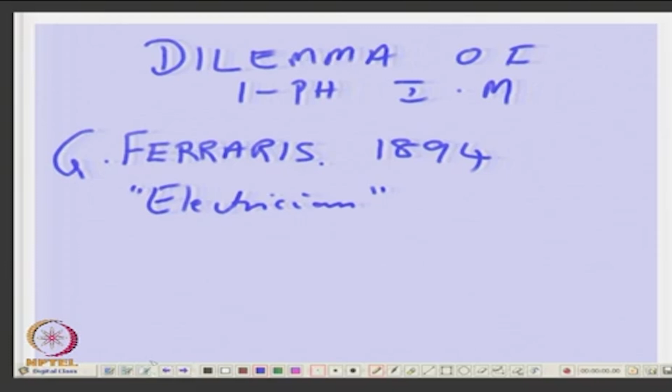So it was this which postulated, as we mentioned in the last class, that if you have 3 phase lines A, B, C, and you have the stator A, B, C phases, and the rotor is squirrel cage with a common shaft, he said all you have to do is take A, B, C and make it A, C, B.

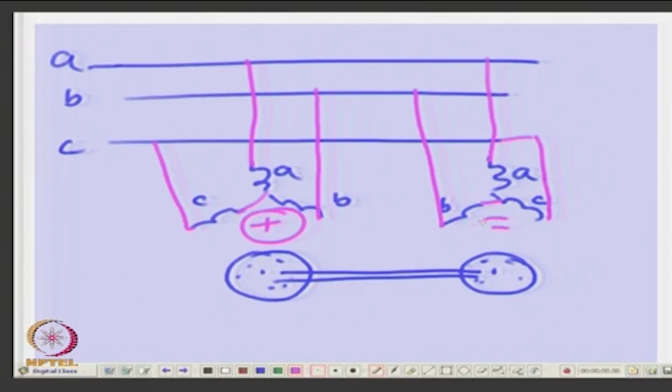That means you connect properly for these ones, and the same windings you connect in a different way. This is positive sequence, this is negative sequence.

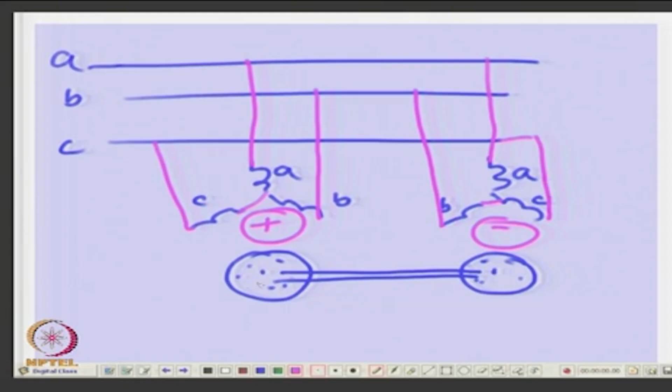That is what was postulated, which meant that this will spin the machine in one direction and this will spin the machine in the opposite direction. So the net torque will be, if this produces T1, this produces T2, it will be T1 minus T2, that will be the torque. And this was what is known as the Ferraris model.

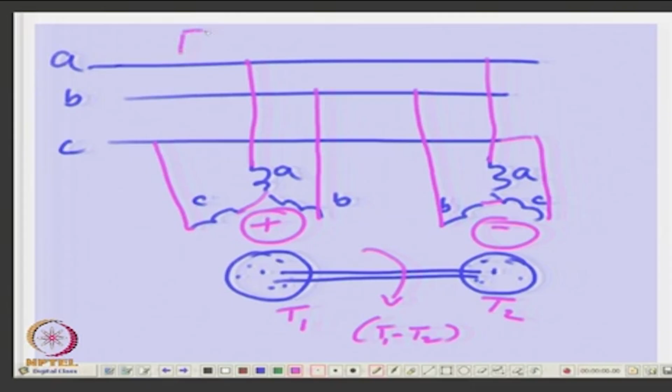But this was found to be later wrong. Why? We tried to explain last class why it was found to be wrong. He said this single phase motor was supposed to be equal to this, right, whatever this motor was producing, the torque or the currents or the heating must be same as this. Because we found out that if you pass a single phase winding, it produces two counter rotating fields in the air gap, and the reaction of the motor will be a cumulative reaction of both the fields.

But I explained last time there is some fallacy in this logic. What was the fallacy? Forward field is not equal to the backward field because the slip is different. Because at different slips, the reaction of the rotor to the forward field will not be same as the reaction of the rotor to the backward field. So the rotor gets magnetized differently at different slips.

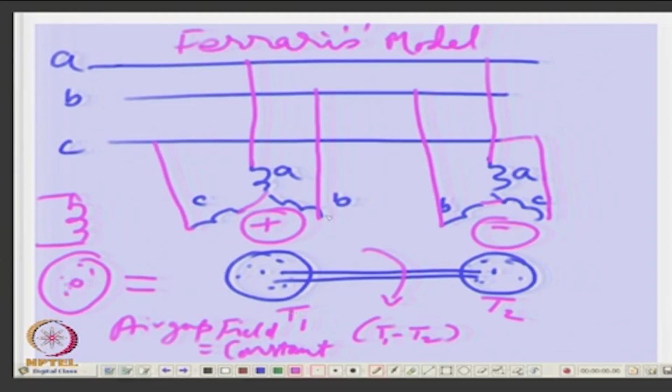So what this assumed was, the air gap flux here forward and the air gap flux here backward are both equal, this flux and this flux, because they are applied with the same voltage. And you should know that flux is always proportional to voltage and MMF is always proportional to current. MMF that is produced is proportional to the currents carried or the magnetizing current, whereas air gap flux is proportional to voltage applied. Why? What is the relation? You must remember that voltage is equal to 4.44 F into N into phi. So as long as you maintain the voltage and frequency constant, your flux will remain constant, neglecting the series drops etc.

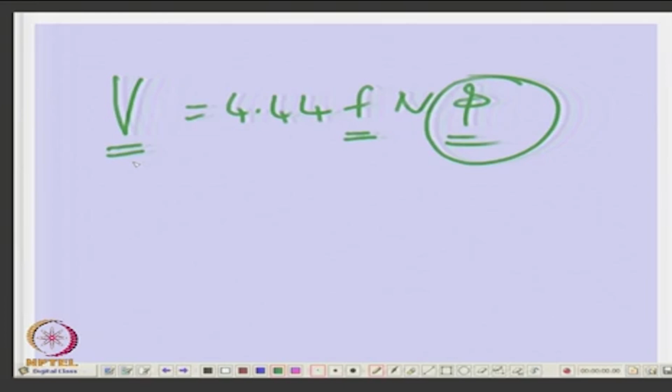Therefore I am trying to emphasize this, that in a 3-phase induction motor, throughout the operation, so long as the voltage and frequency is constant, air gap flux per pole is constant, only that flux per pole is rotating. It is like you are spinning a fixed magnitude magnet in the rotor, that is what it means. The air gap is like you are spinning a magnet, but the magnet is not changing its strength. Is that clear? Because from your reaction I am feeling your reaction is also not very positive. Is it clear? Any doubt on this?

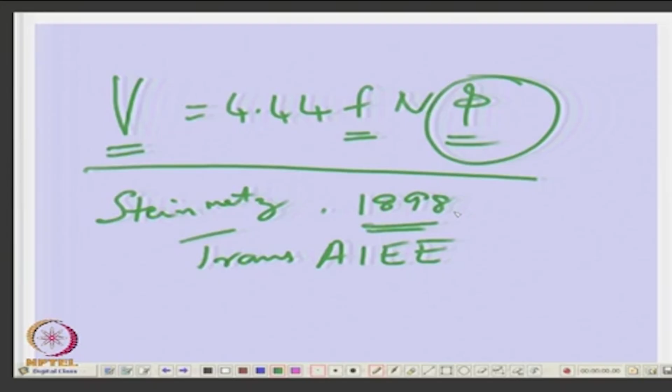So that was Ferraris's concept. He said it is like two air gap rotating fluxes, rotating field means he meant rotating fluxes. But then Steinmetz gave a new concept. Ferraris's paper was in 1894, and Steinmetz's was in 1898, in the transaction of American Institute of Electrical Engineers. You can imagine we are talking about a 108 years old story. In this 1898 paper, Steinmetz gave what is known as the cross field theory.

Which is now popularly known as DQ theory.

He said a single phase machine has to be resolved into two fluxes at quadrature and analyzed appropriately. This is the DQ model. Those who have studied machine modeling know what is known as a DQ model, and you can write down those DQ equations to get the solutions, and this gave the correct concept.

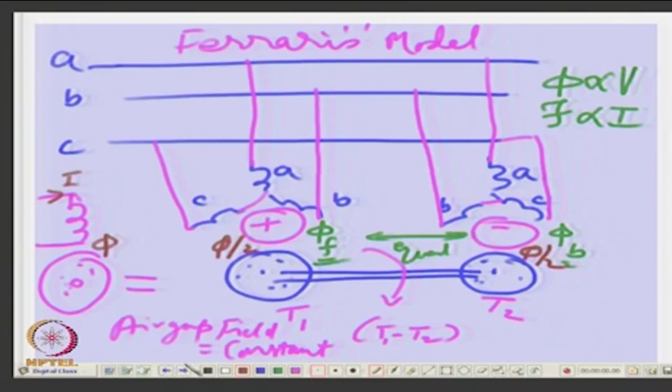The problem with this model was that the current carried here was not the same as the cumulative current of both systems, even though you make the flux half. If this is flux phi, this flux is supposed to be phi by 2, and this flux is supposed to be phi by 2. If the single phase motor was having a flux phi per pole, this should be phi by 2 and phi by 2. But this current was not the same as the total current carried by both machines, and this heating here was much more than the other, and the torque was different at other slips. This created problems, and that is why the cross field theory came.

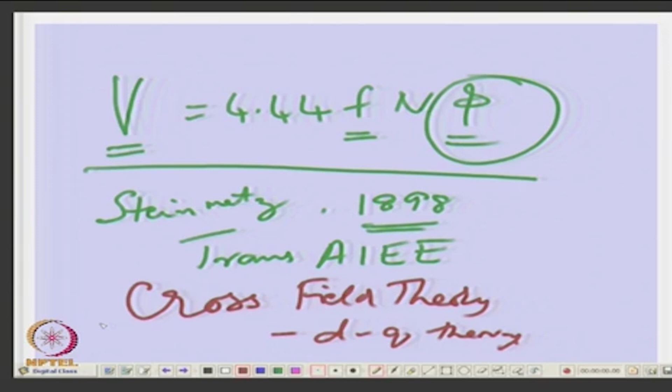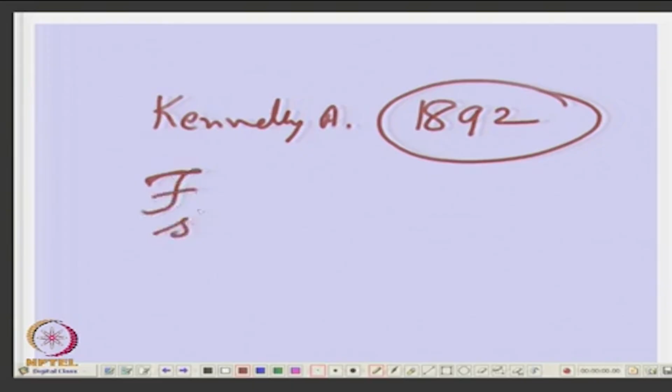As an explanation to this, it was Kennelly, in the same paper, as a comment to the same paper in 1892, who said it is possible to explain the single phase machine with rotating field theory, provided we do not assume the rotating fluxes are the same, but assume that what is the same is the rotating MMF. So rotating stator MMF Fs plus will be equal to Fs minus. That was the whole concept we had to take care of.

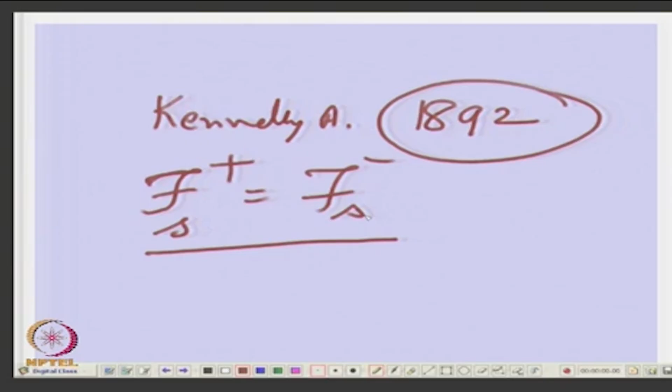Now, how do you explain this? Can we write this down? We have this one machine. So what you can do is, instead of connecting them in parallel, you connect them in series.

Let us say from A phase it goes to A winding. This is the other A winding. Now the other one is B winding, it comes here, but the B winding is connected to the C here, supposing ABC here and ABC here. So you have connected the other way around, and similarly for the C winding, you connect it to the B winding.

So in this case, Fs plus equals Fs minus, but phi plus is not equal to phi minus. So if you connect the stator like this, this is the correct way. That means the stator winding should be connected in series and not in parallel.

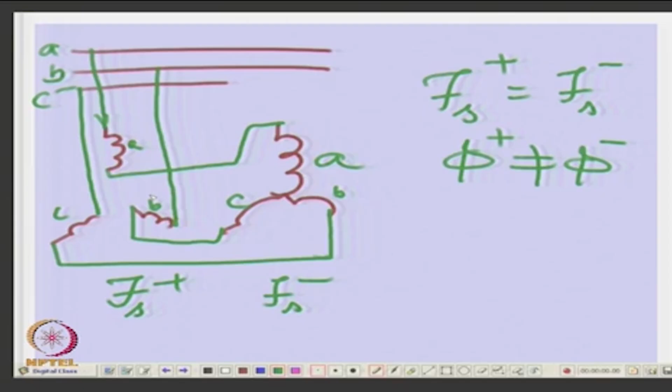If you connect them in series, this is your Fs plus and this is your Fs minus. Since the same current is flowing through, only thing is you have made the stator MMF opposite by connecting it in the opposite way like this. So this is Kennelly's connection, or a series connection.

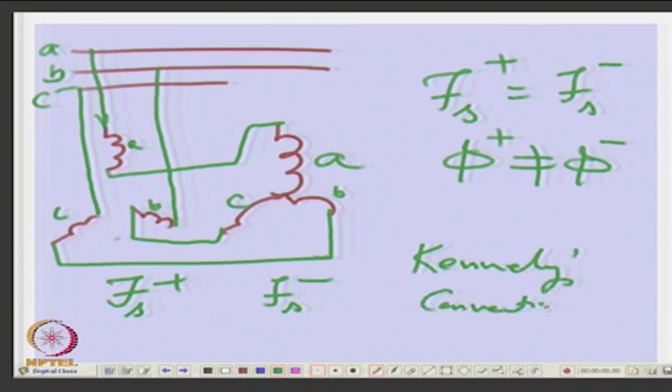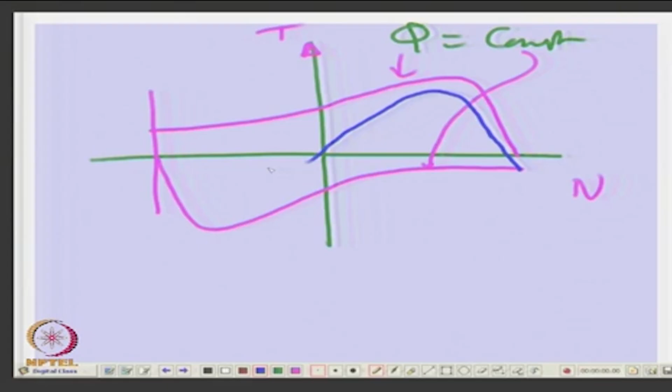So we said that if you have the flux constant, you have one type of curve for torque versus speed. This is flux constant, so this flux is constant, same as this same flux, and you have a resultant, say something like this. This is the net torque, this is T forward, T backward. Throughout, the flux is maintained constant. That is the one model which is not correct.

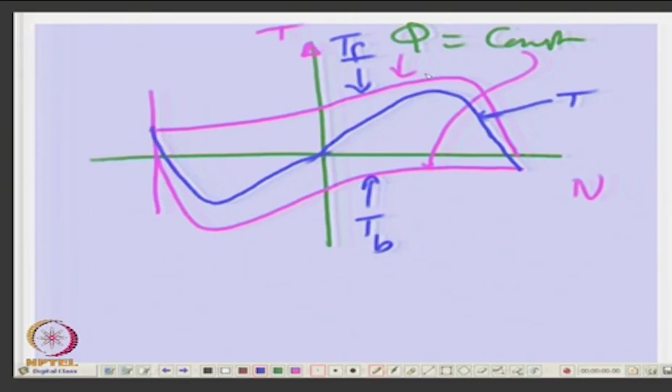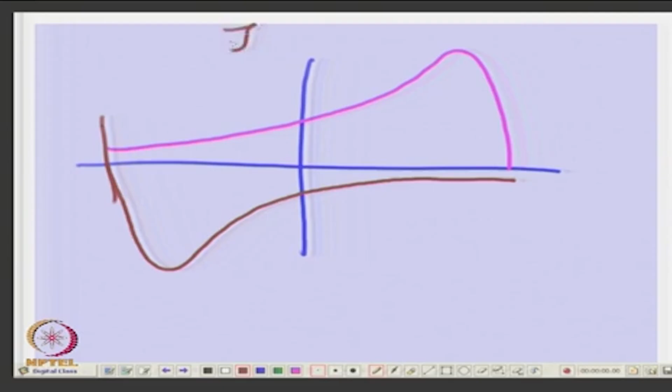Then the other model was where you do not keep the flux constant. Here Fs plus equals Fs minus, and phi plus is not equal to phi minus. Is it okay? It is this connection, in which case your net torque will be something different.

This is the torque. Now you are getting more torque in the forward field than the backward, because rotor reaction was different, other than at starting. So at all these points you would find that phi f was more than phi b at all other speeds.

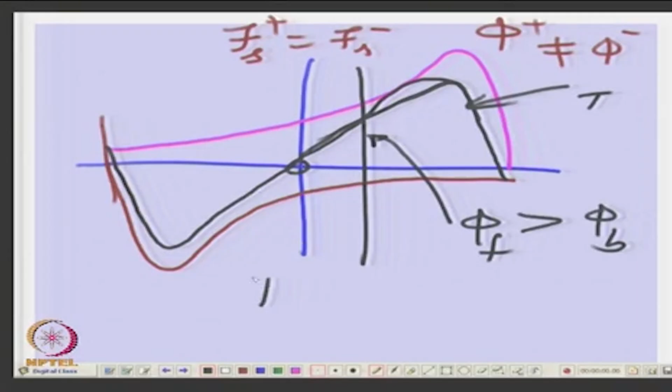Why was the forward flux per pole more than the backward flux per pole? Because flux is due to the combination of stator MMF and rotor MMF, and the rotor MMF was weaker. The rotor MMF was in a way that it would enhance the forward flux, and it would reduce the backward flux, because rotor current due to the backward field was more, because of larger slip. Therefore this was the condition. So you will notice that you will still get T start equal to 0, starting torque is 0. Then what do you have?

You have another feature, that at synchronous speed, what do you notice at synchronous speed? There is a negative torque at synchronous speed, that is what you notice. And third one, you notice that there is another point of zero torque. It is below synchronous speed.

Here T is 0 and N is less than synchronous speed, and this is your synchronous speed. So these are some features that you will notice, and you will also notice that the maximum torque occurs at some point which is at a lower speed than what it would occur if only forward field were there.

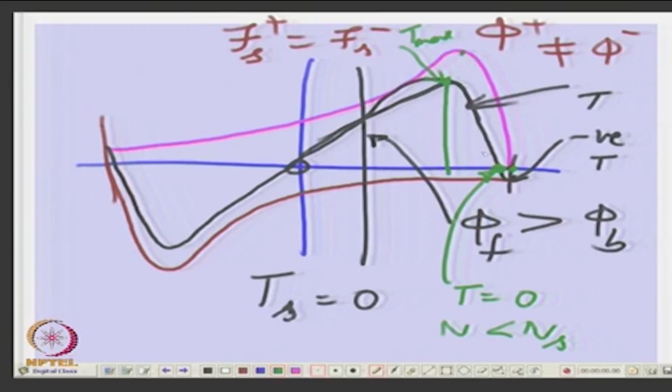So the single phase motor, you will notice the maximum torque occurs at a lower speed, the slip at maximum torque is at a different point, and the starting torque is 0, and there is a zero torque at a speed slightly less than synchronous speed, and at synchronous speed the torque is not 0, but it is negative, because the torque is 0 only due to forward field at synchronous speed, but there is some negative torque due to backward field. So these are some of the observations that we can make on the single phase induction motors.

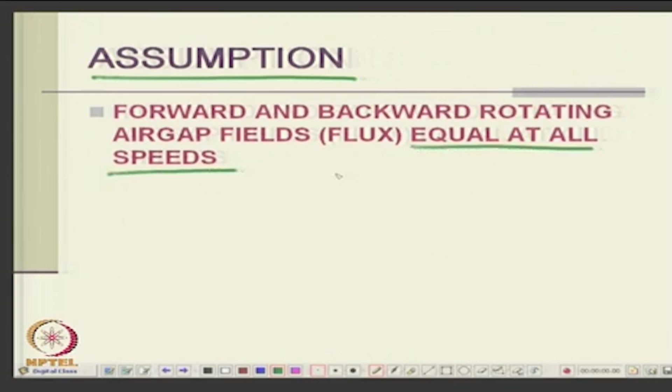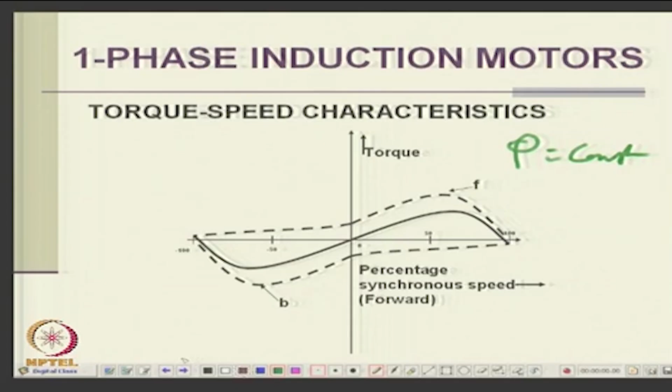So, to sum up, we already said forward and backward rotating flux are equal at all speeds. This is a wrong assumption, this was when flux is constant. This was known as the Ferraris model, which was not correct. Then we said that Fs plus is equal to Fs minus, only the stator MMF is valid. Then rotor MMF opposes stator current.

So there is a reduction in the backward flux wave and aiding in the forward flux wave. That means in the air gap, if you look at a forward rotating magnet, it is a stronger magnet than a backward rotating magnet, unlike in the double revolving field theory where it was assumed to be the same magnet. So that will change at different speeds.

So the forward torque of the motor increases, so we have better characteristics. So here, Fs plus equal to Fs minus, this is what we had concluded. I am slightly emphasizing this, spending some more time, because I think you have to be very clear. At this point, if you are not clear, let me know.

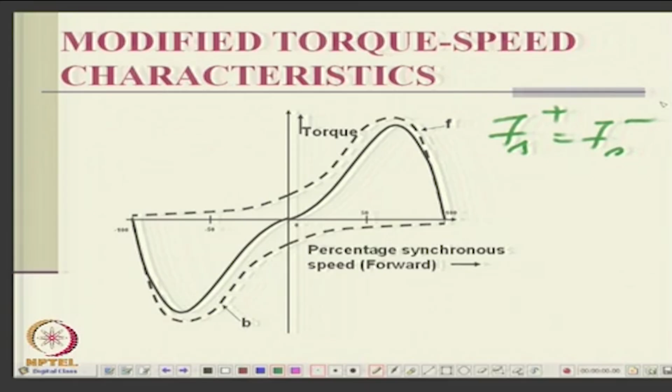So it is simply that the stator surface is magnetized differently and the rotor surface is magnetized differently due to the respective excitations.

So therefore, it does not have a starting torque, therefore you must give a starting torque. Initial deflection is required to start the motor. So initially you must start, but there is a running torque. As soon as you start, there is no problem, it will run. Therefore, initial deflection can be provided.

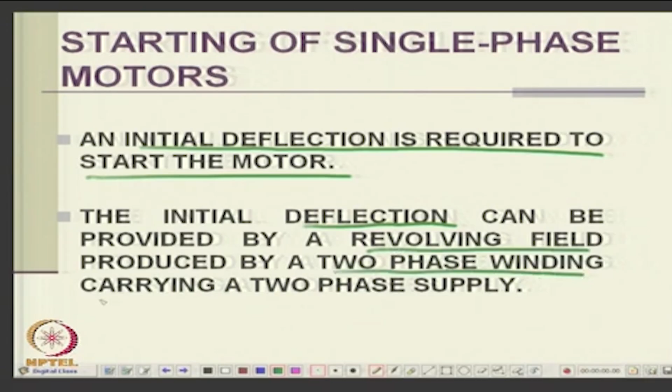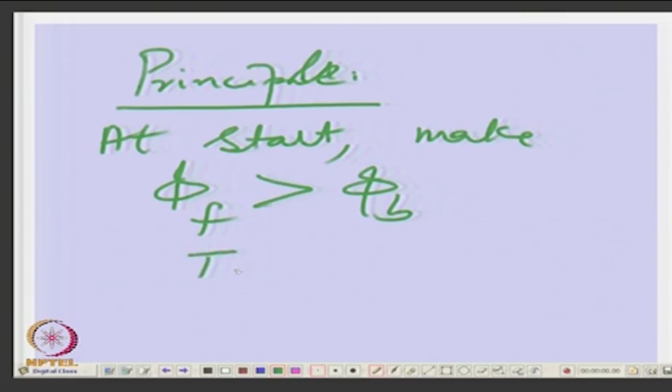That means at starting you must make the forward field stronger than the backward field. So you must have a revolving field produced by two phase windings carrying two phase supply. So the basic principle is: at start, make forward field more than backward field. That is your principle of starting. Somehow make it so that at starting you have a stronger forward field than the backward field. Then T forward will be more than T backward, so T starting will become positive.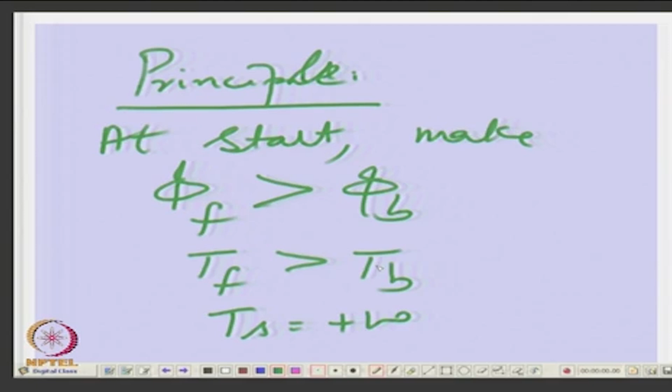So how to make the forward field stronger? The procedure used is to use two windings: one is the main winding, another is the auxiliary winding. There are two windings and they are at quadrature.

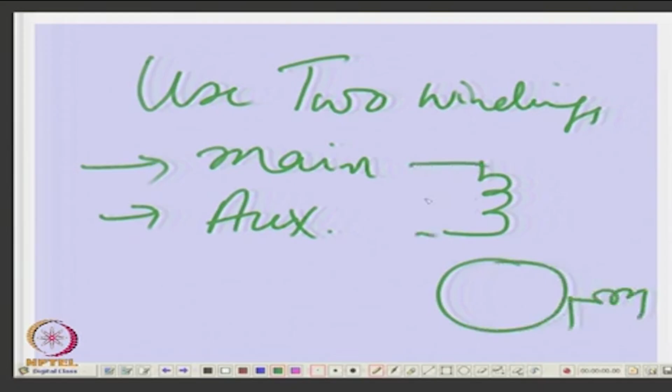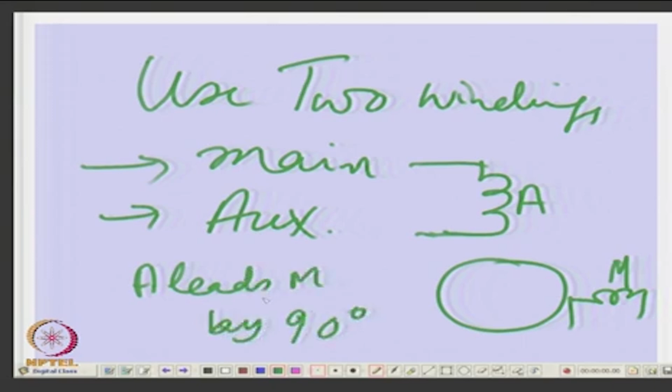Now, if this is leading, this will be the auxiliary winding, this will be the main winding, because A leads M by normally 90 degrees. They are wound in such a way that the auxiliary winding leads the main winding by 90 degrees electrical. So you have to wind it that way, so it is called a two phase winding.

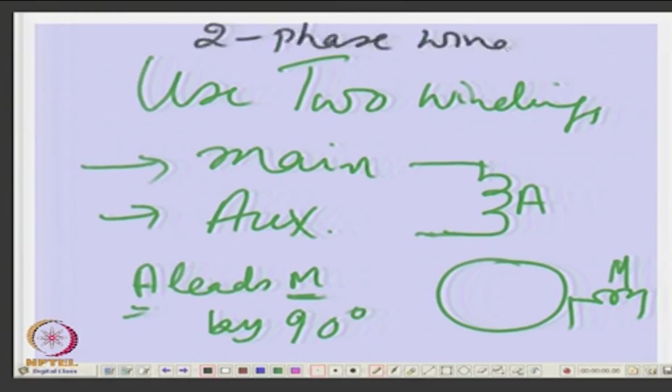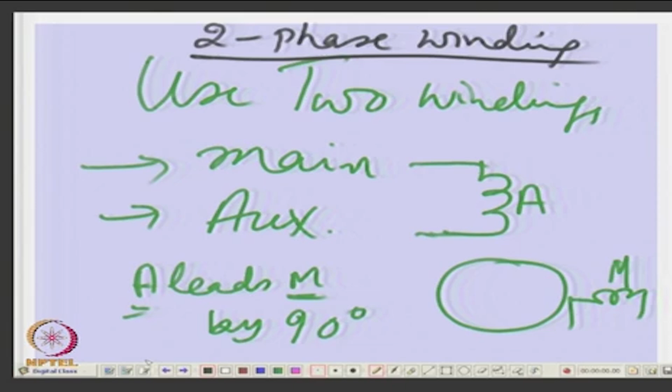So use the two phase winding, that is what we should do. Now just placing two phase windings will not do, there is another requirement: you must make I at the auxiliary winding lead I at the main winding. This is also important, because just two phase windings, if they carry the same current, will not be of any use, it will again give a pulsating field.

Therefore, if this is I A, this should be I M or whatever it is, so it should be leading, preferably by 90 degrees. But even if it is not, it will still create a forward field. Desirable is 90 degrees, but even if it is 40 degrees, it will still produce a forward field. Windings would be ideally placed if you do not want any negative field at all. What should you do for the ideal condition?

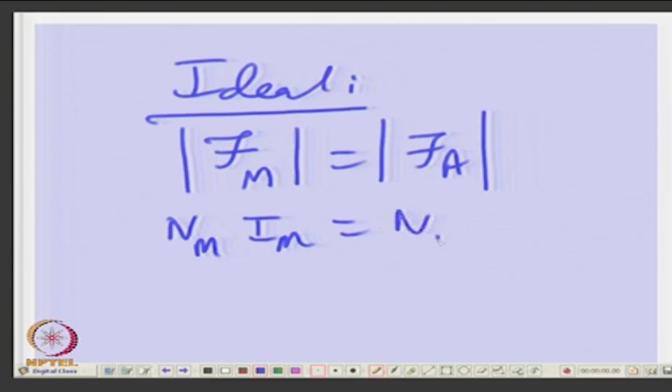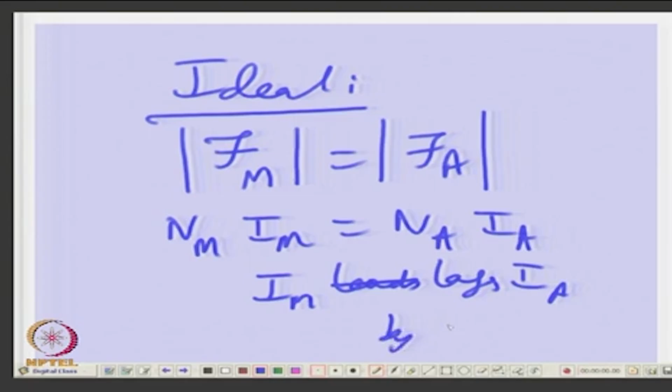Ideally, the MMF of the M winding should be same as MMF of the A winding. That means Nm Im should be equal to Na Ia, and Im should lag Ia by 90 degrees in time.

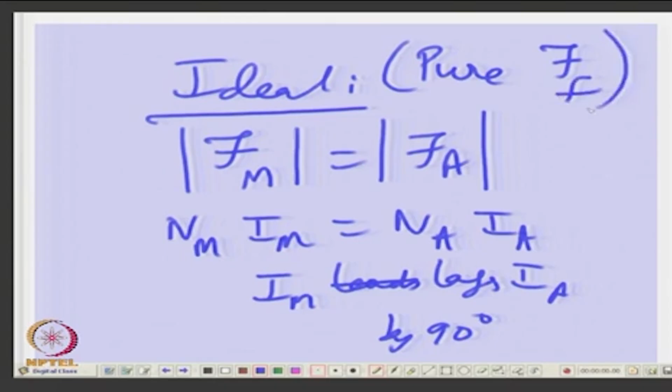Only then will it be a pure forward field. You will have a pure forward MMF, with no backward field at all, because a 3 phase winding carrying 3 phase balanced currents gives you only forward field and no backward field. Similarly, a 2 phase winding carrying 2 phase currents will also give only forward field and no backward field. I hope you have not forgotten this basics.

After all, you can create a purely forward rotating field by any M phase winding carrying M phase currents. It need not be 3, it could be 4, 5, 6 or 10, so long as you can produce these multi-phase currents. That is why people are now talking of multi-phase windings, because power electronics can give you any phase currents. By DC you can create any phase, not necessarily 3 phase, you can have 5 phase, 6 phase, etc.

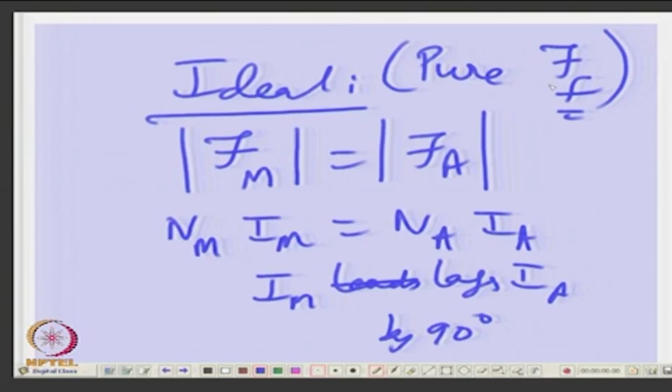So this is one thing you have to produce to start the machine. The principle is: to start single phase motors, you need a 2 phase supply obtained by splitting the phases, and then you have the auxiliary winding used to aid in producing the starting torque. So, whatever I said, agreed?

Therefore, the main and auxiliary windings are supplied by currents in almost quadrature to produce starting torque. So they must carry currents nearly in quadrature. Of course, after starting, either the auxiliary winding can be removed, since it has no purpose. So you make it in such a way that the auxiliary winding can be wound for short time duty, it need not be wound to carry full current all the time, and you can disconnect it.

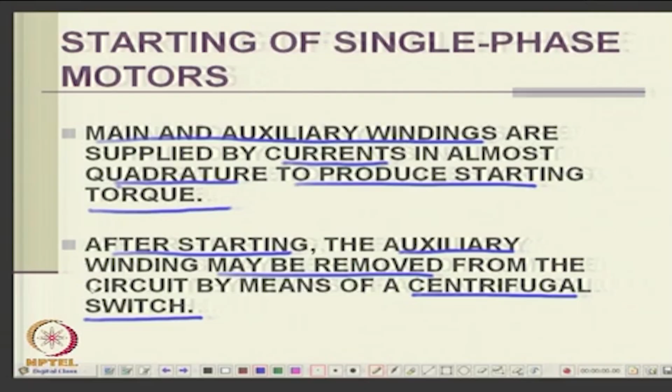And for disconnection, we have seen what is known as a centrifugal switch, a mechanical arrangement in which it can be automatically disconnected. Nowadays you can think of electronic switches, etc., but as of now nobody has produced a switch cheaper than a centrifugal switch. Even electronic switches to disconnect tend to be costlier than a mechanical centrifugal switch.

Now, normally the starting torque depends upon the extent of phase splitting, and is proportional to sin theta, where theta is the angle between the main winding current and auxiliary winding current. So typically, T starting will be proportional to sin theta, where theta is the angle between main and auxiliary winding. So when will you get the maximum starting torque? When theta is 90 degrees. Any other angle, it will be less.

So one way is you have two windings, split phase motor, but the impedances are different. So Z main is different than Z of the auxiliary winding. That is one thing, so they carry different currents from the same supply voltage V. This will be the main winding current and this will be the auxiliary winding current.

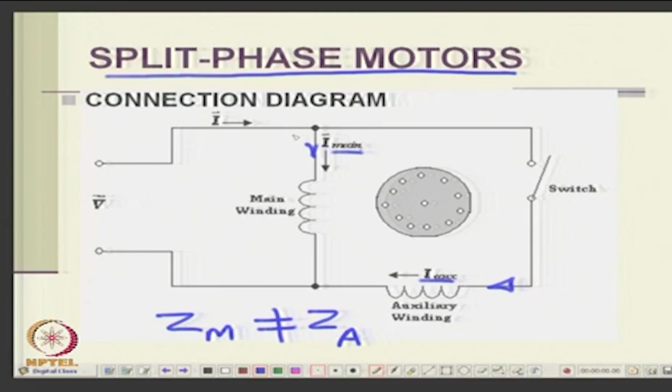Now, you want this to carry a leading current, this I auxiliary must lead I main. So what do you do for the impedances? What can you do if you have only two windings to split phases? What design changes do you make? Two windings cannot have the same impedance, isn't it? If you have the same impedance, they will carry the same current and same phase angle. But you want phase splitting, the phase angle must be different for Im and Ia. What do you do?

No, I am not allowing you any capacitor here, this is no capacitor here. Impedance of both windings are different. How much? What should it be? You know what is meant by impedance. Z main will have some R main plus j times X main, and Z auxiliary will have its own resistance RA plus j XA, let us say.

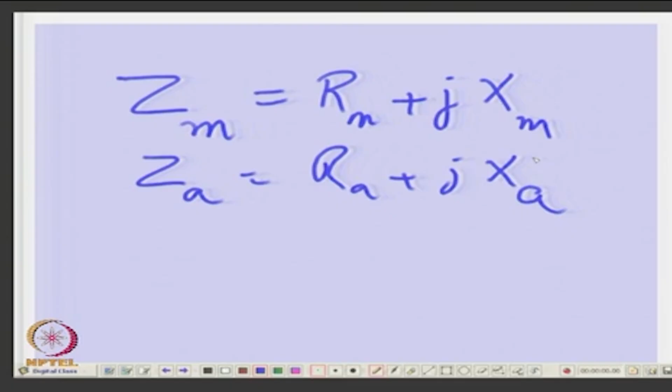Now, if you want IA to lead IM, what should be the relative magnitude of these impedances? RA should be greater than RM. So you want RA to be more resistive, and this one should be more inductive, isn't it?

So here RA must be greater than RM. That means you wind the auxiliary winding with thinner wires, longer wires, more turns and so on. And another thing you would prefer is what are reactance? XM must be...

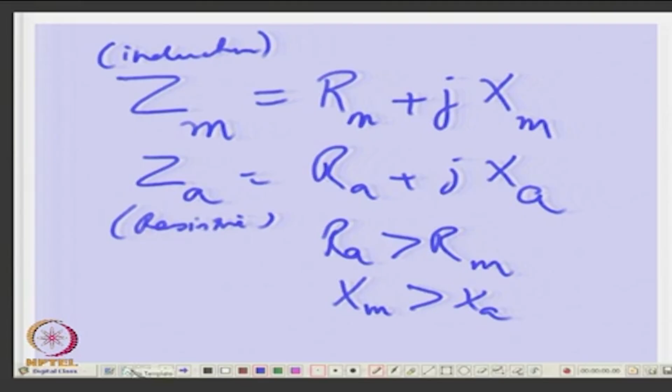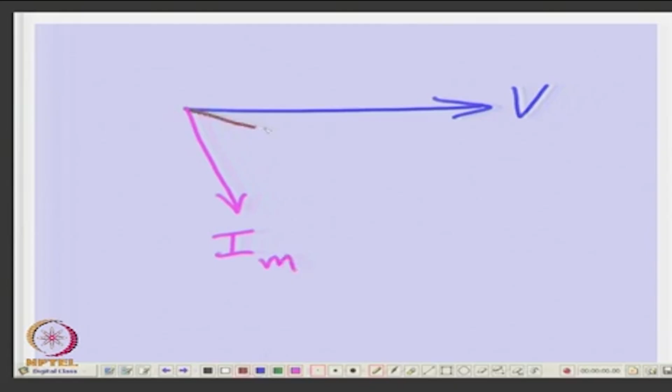So you must design it in such a way that the impedances are different. Therefore, you will invariably find for the same voltage IM will be lagging more than IA. Both will be lagging, of course, because it is more resistive. So this may be phi A and this may be phi M. I think it is very simple circuit theory.

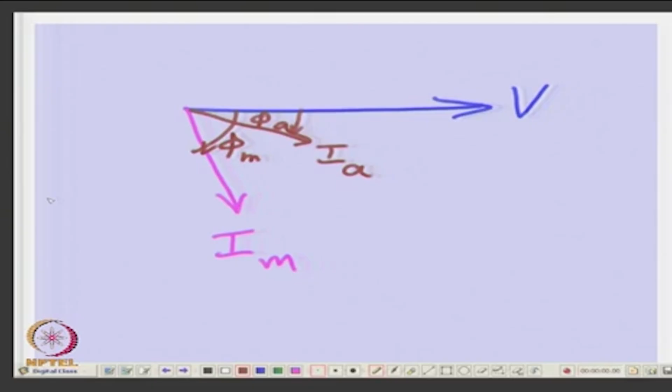You make one more resistive than the other and you get this, this is a split phase machine. So you will get some starting torque. This is one of the simplest ways to do this. So in split phase motors, the phasor diagram, you have the same voltage, I auxiliary, I main, and total current will be I. But if you disconnect that, because this current will not be same, and other slip's current will be different.

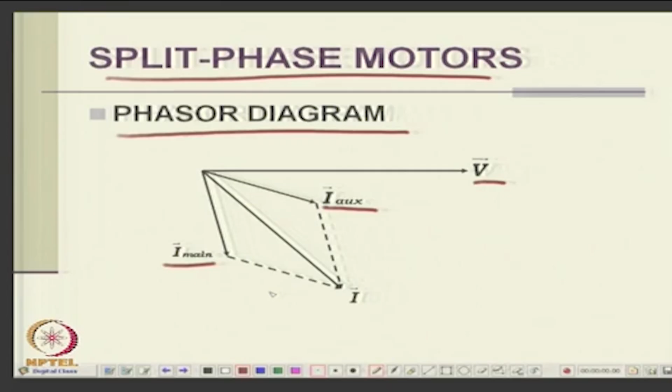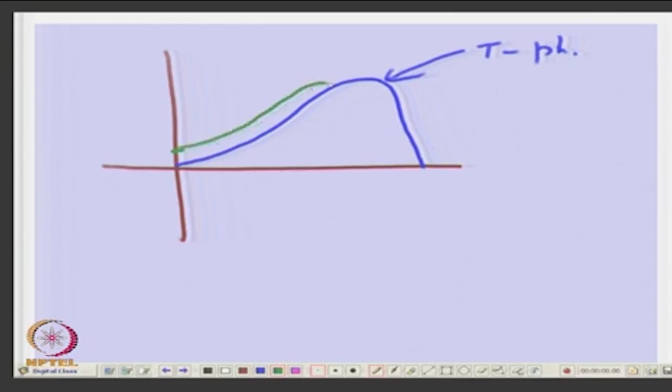So you may have a, if it is a normal single phase machine, if you have these characteristics, supposing this represents the torque-speed characteristic of the single phase, and if it is split phase, it will have some starting torque. So it is possible it will go something like this. This is for split phase.

Two winding you have this characteristics and one winding this characteristics. And of course after some time you operate a switch. Switch means you remove the second winding. So what will happen? Maybe at this point you remove it. What will it do? It will go to, if you switch - this is the switch - that means you disconnect the second winding. So it will follow the torque speed characteristic of the first winding. This is the point of switch. At this speed, let us say, the centrifugal switch will operate when it reaches near synchronous speed.

Is it clear? So the net characteristics will be as mentioned here. It will follow, so somewhere it will follow this. The total characteristics, split phase.

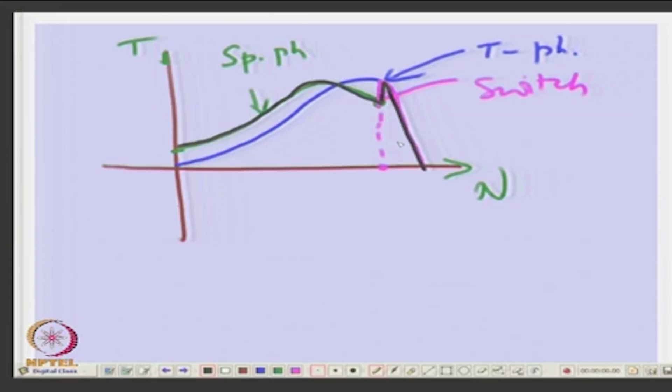Now, next other way is, as you can connect a capacitor in the auxiliary winding, because then you do not have to bother too much about your design of the second winding. So in fact, the second winding can be similar to the first winding, because since you are connecting a capacitor, you have less of a problem. Therefore here your auxiliary winding will be, since it is capacitive, it will have a leading current than the main winding, and you can adjust it in such a way that this can be nearly 90 degrees.

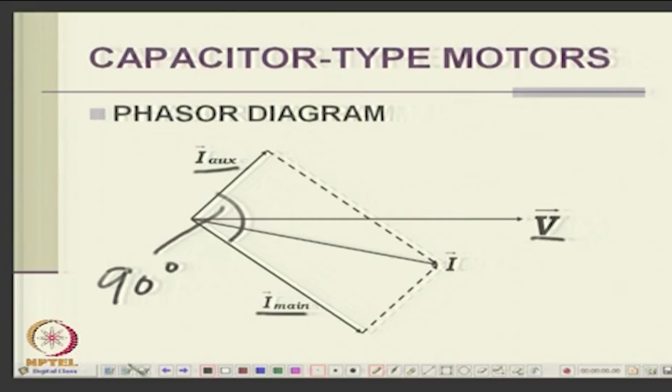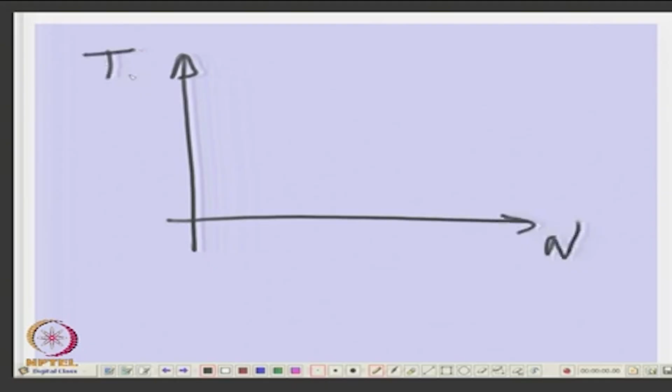Auxiliary current will be leading the main current, though they may not have the same number of turns, but they are wound in such a way that they will lead by 90 degrees. Any doubts on this? So we have created another arrangement, and here also, if you have the torque speed characteristics, if this is single phase, one winding...

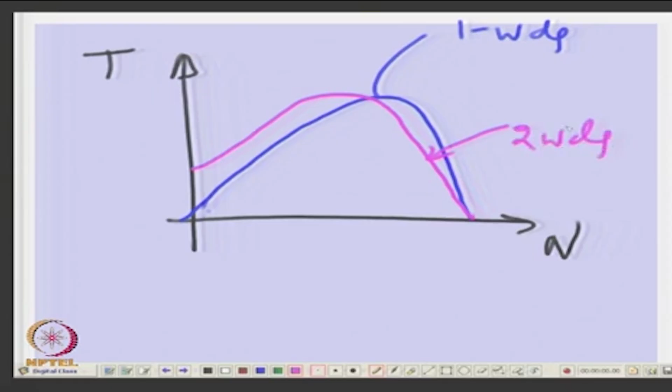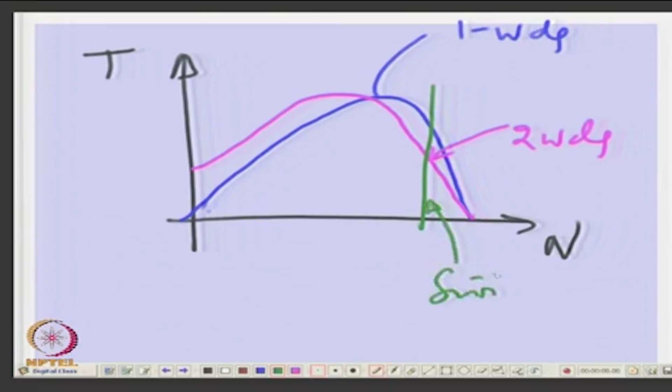And again you may have two windings, okay, with capacitor, and you will, if you operate the switch here - switch operates here - it is easy to see that the net characteristic: it will start initially, it will follow these two winding characteristics, and after the switch operates, the second winding is disconnected, it will follow the one winding characteristics, that is here. So this is the net characteristics.

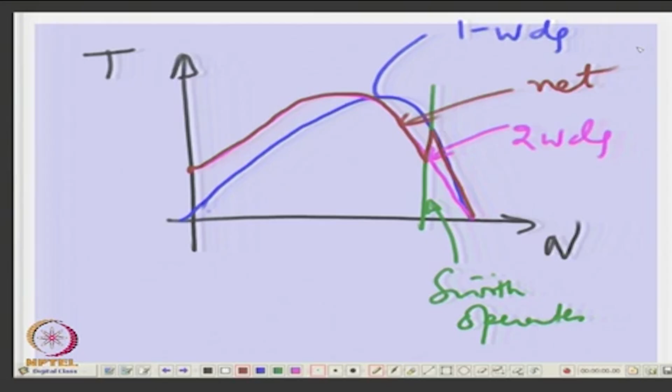Is it clear? So at starting it follows the two winding characteristics, at running it will carry the one winding characteristics. Of course, whatever I am explaining now is more a qualitative explanation. We will go into a more quantitative one subsequently.

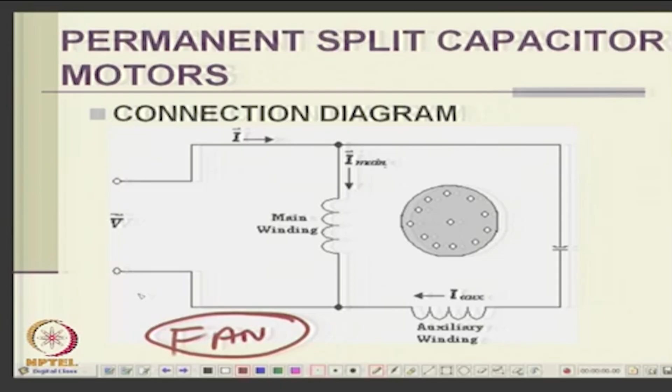Then, other way is: do not disconnect the second one, keep it permanently. How does it matter? So what is the difference between the earlier one and this one? What are the differences that you will see? In this winding, if you want to make a, these are like fans, your ceiling fan has this one. These ceiling fans have capacitors connected permanently. Now you tell me, what should a designer take care with reference to the earlier one where the second one is disconnected? If you have to design both the motors, one is capacitor start only, another is capacitor run.

Is there any precaution or factor to consider? For good induction, the auxiliary winding should be of good quality, capable of running full time. If you want your fan to operate throughout the night, whereas for starting only you can make a cheaper, low capacity winding, because the design must withstand the heat. If it's only for a short time, a thin wire will do.

Every copper wire has a short time rating and a long time rating. A small wire can carry 100 amperes for a fraction of a second, but not for a whole hour. If it has to run for an hour, you must use thicker wires. So that is the main difference between short time rating and full time or continuous rating.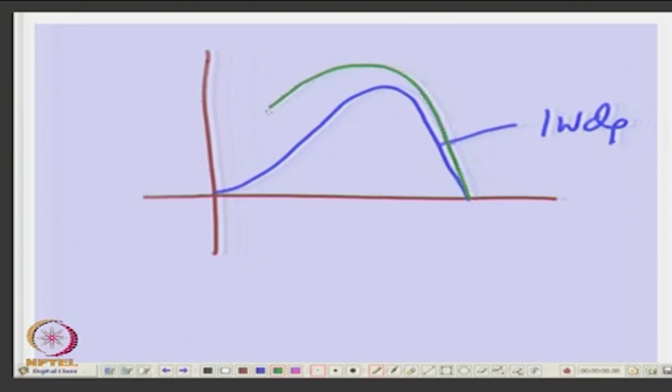So this is what we had to do. Here again you have the characteristics. If it's one winding, you have these characteristics, and with both windings you get better characteristics, plus a capacitor, two winding plus capacitor. Obviously, used here there is no switch coming into the picture at all.

Then there is a third way. I think the initial condition will not change in both cases. That is true, but the design was different. In the first case, the auxiliary winding carries the starting current for a short time, and as soon as you switch and disconnect it, it no longer carries current. Whereas in the second case, it is continuously carrying current and producing its own torque.

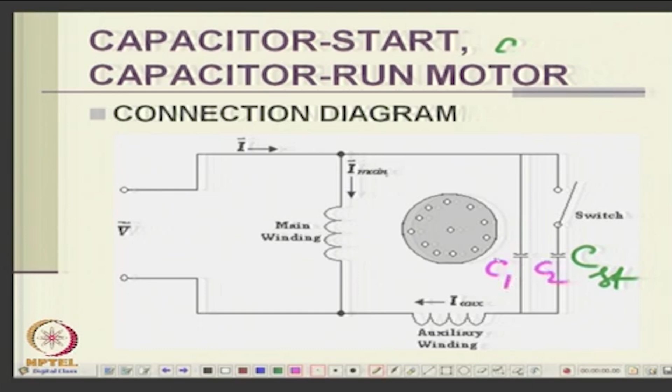The third one is capacitor start, capacitor run. So this is a start switch. Initially what happens: you can have the total capacitor, let's say C1, and C2. So at start, what will be the capacitor? C1 plus C2. At run it will be C1 only, isn't it?

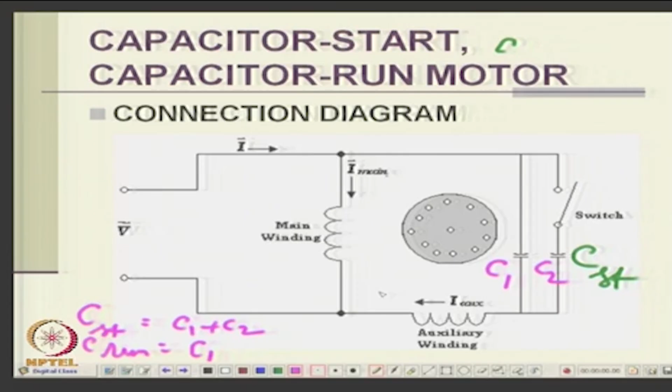C2 is usually required because you need a higher starting capacitor than a running capacitor. Therefore you have two windings, but both windings must be made fairly robust, because they will always be carrying current. Only the capacitor you can adjust. Why do we need this compared to the second model? At starting we put the whole load on one capacitor, so it should be of very good quality. But if we distribute it into two, initially we can have a lower quality capacitor for both, and then for running purpose we use one. That is one logic.

There is also one very important thing: for best performance, the starting capacitor is higher than the running capacitor. You need one capacitor to start and another to run, isn't it? The starting capacitor will not be the same. So if you have a continuous running system with a single capacitor, it should be a compromise between the two — it won't give you the best performance for both starting and running. Therefore the third model is better than the second, because you have an option to choose capacitor values most suitable for starting and most suitable for running.

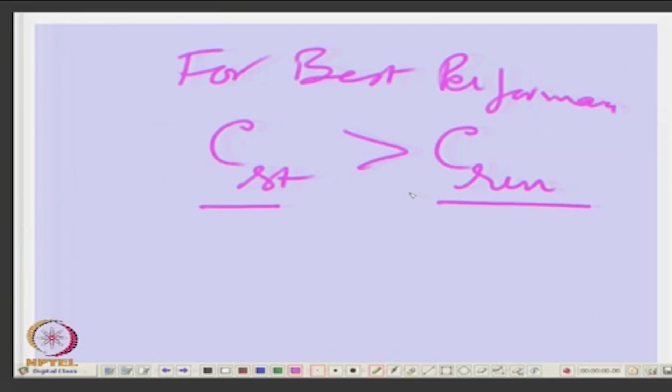And the starting capacitor may have a lower short time rating, while the running capacitor must have a continuous rating. So when the motor is running, why is the running capacitor needed — for power factor improvement or something else? No, the running capacitor is needed because you design the motor to give good torque with both windings in operation. Now both capacitors are running, both windings are carrying current, both are active at starting and at running.

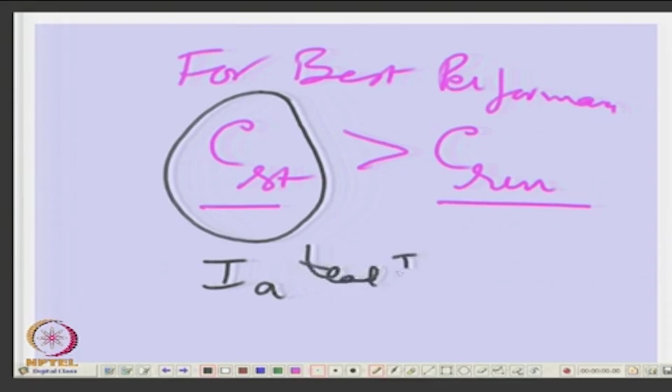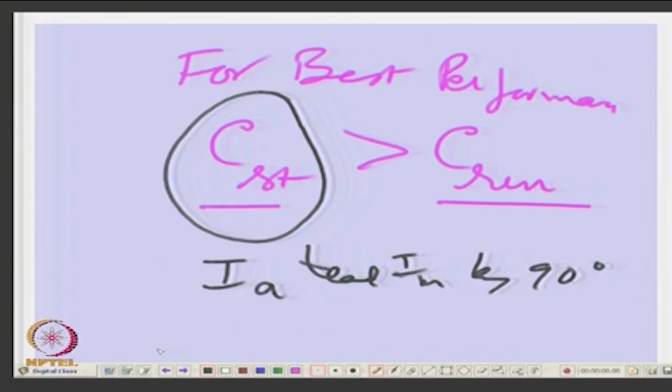So why do we need a higher capacitor at starting? For more torque, because impedances are different at different speeds. You want a good balance of the winding currents at starting. After all, to make a balance, your objective is to see that both windings carry balanced currents at quadrature, 90 degrees — we'll discuss this more when we go into the theory of these two winding systems. You want I auxiliary to lead I main by 90 degrees, and the same capacitor will not do at all speeds, since impedance of the motor changes with slip, so the currents in main and auxiliary windings will differ.

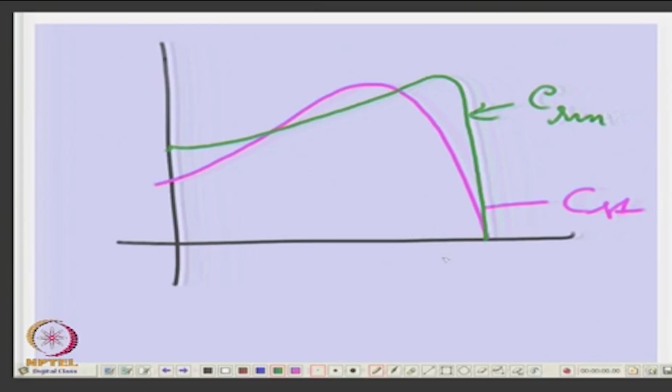So that is the problem. Therefore, if you plot characteristics for two capacitors: say this one is for the starting capacitor, C start, and you may have another characteristic with C run — I am just giving you some hypothetical curves. So there are two characteristics, and you have a switch which will operate somewhere, this is the switch.

Switch operates. Therefore, it is easy to note that your characteristic will start from the C start and then it will come to C run.

Is it okay? I think in the starting, for C, starting torque should be more, right? Yeah, starting torque more, that is right. So you can even have, yeah, in fact that is what you expect anyway. Let us see. So it can have some better characteristics, not this, okay.

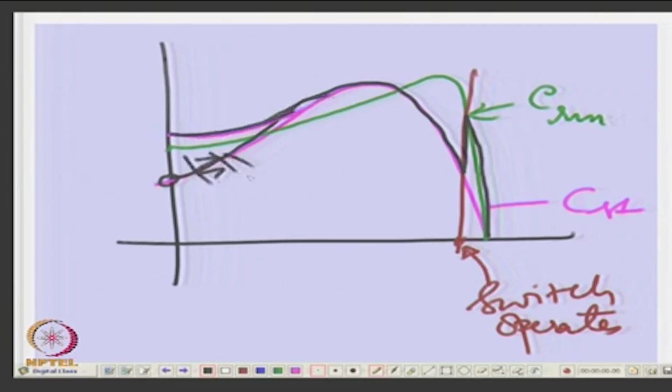Let us see we can. Okay, now is it okay? So we have just made different mechanism of starting methods, right.

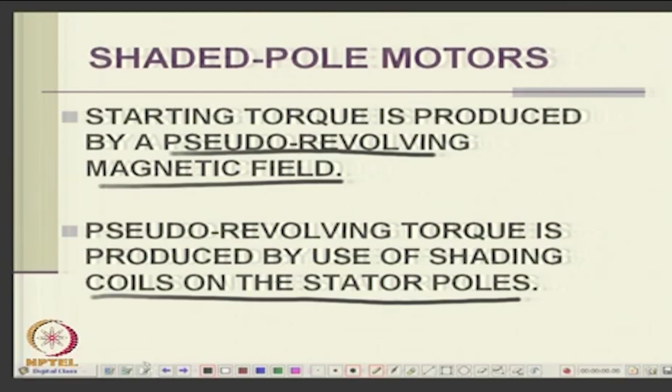Now there is also another one, the shaded pole motor, where two windings are produced, giving a pseudo rotating magnetic field, where the pseudo revolving field is produced by using a shading coil on the stator poles. Constructionally, you have a shading coil, a short circuited copper strip wound over 1/3 of the pole face. The shading coil produces a variation in the instantaneous flux caused by the stator winding and gives the illusion of a rotating magnetic field.

So it is typically, I wish we had a... you have a normal squirrel cage rotor anyway, and you have a normal winding, the main winding. So it will produce a

main flux. Then what you do is you just make a small cut here in 1/3 of the space, and here, okay, and you make a small strip, just make a ring, this is called the shading ring, and you make it here also. So this is also a shading ring.

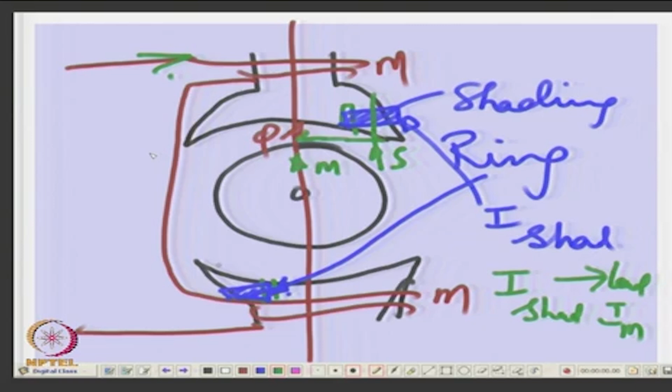Okay, so this is quite used in most of your table fans, etc. So that is, it will have some characteristics like this. This is the torque speed characteristics for shaded pole motors.

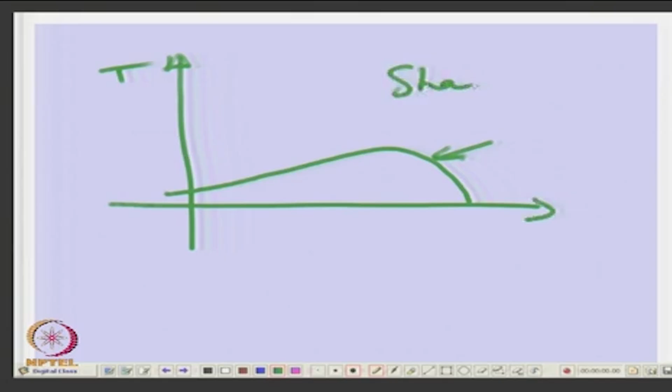Any advantage of these type of motors as compared to the capacitor type motors? Very simple to make. I mean, advantage is, after all, when you go to buy something, what will you ask for? How much does it cost, right? Customer wants two things, one is the cost, another is quality, and this is the cheapest. You do not have to do anything, you just put a ring over there, that is all, no capacitor, nothing.

Because then you have to, and simple to make. Shaded pole motors, what is there? Squirrel cage is there, and it's all small size. So you can use it in relays and all, yeah, all small motors. Why not used in ceiling fans? They are used in table fans.

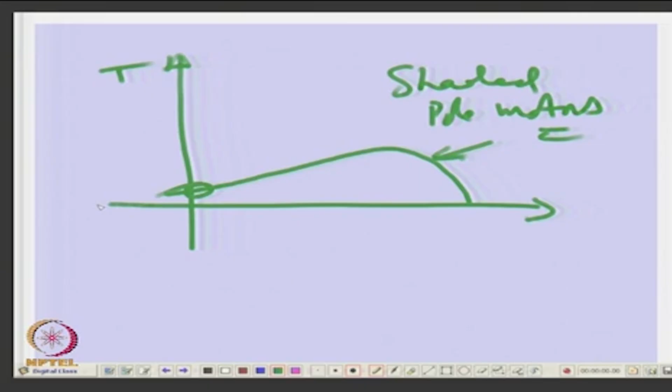Ceiling fans you can try, but the thing is, it must develop enough starting torque. Okay, see, after all, engineering is all about compromises of design. I mean, after all, you can always say why it was not used. There are, because of various experiences, you see, this poor fellow cannot give too much starting torque. Shaded pole motor, it's just a little starting torque. Ceiling fan, you have big wings there, it has to have a start, it must give you enough of this. So these are the various things.

Okay, you go to a shop and you ask for coconut oil, and if he says no, I will give you sarson ka tel or something, because you have gone for a purpose, right? Everything is for a purpose. I mean, why can't the shaded pole be used? You can use it, but it won't run. So there is always a necessary starting requirement, starting torque, etc.

Okay, so I think we can stop here. So we have given a general picture of the theory, but as of now we have not gone into the mathematical modeling and theory. Next we have to go into basic analysis of single phase motors, that we will do in the next class.